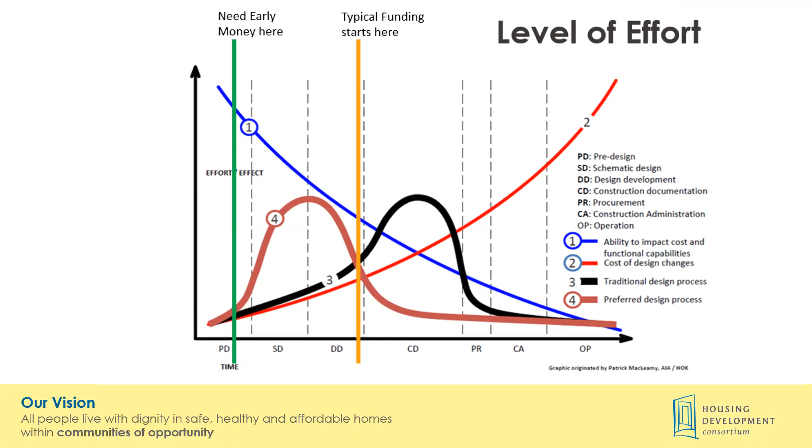So when you look at lines 3 and 4, we're talking about the time and effort for the team, currently focused toward the middle of construction documents, that really needs to be pulled back toward the beginning, where time and effort put in up front makes the decisions that impact everything else following. We all know this. It's challenging to get the resources and time to do it up front, but that's really what we're trying to emphasize in this exercise today.

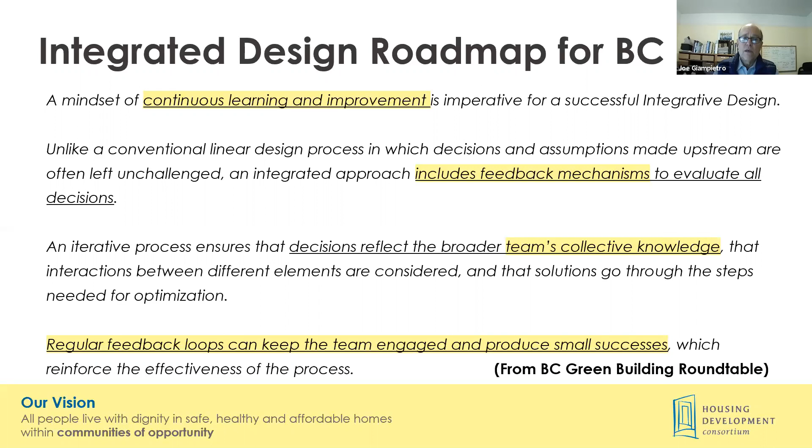Now in British Columbia, they've created a roadmap, and they talk about how continuous learning and improvement is imperative for integrated design. That's not a linear process. It includes feedback mechanisms during the process, and this iterative process enables decisions that reflect the team's collective knowledge with regular feedback loops that can keep the team both engaged and produce successes step by step. That's one snapshot way of looking at it.

So just to remind everybody what we've been doing to date in the Exemplary Buildings program is to look at the context we have. Besides the fact that we have a dramatic need for more affordable housing, we also are in the context of dealing with a changing energy code and its move toward 2030, when we are being asked to reduce energy use in buildings by 70% from 2006.

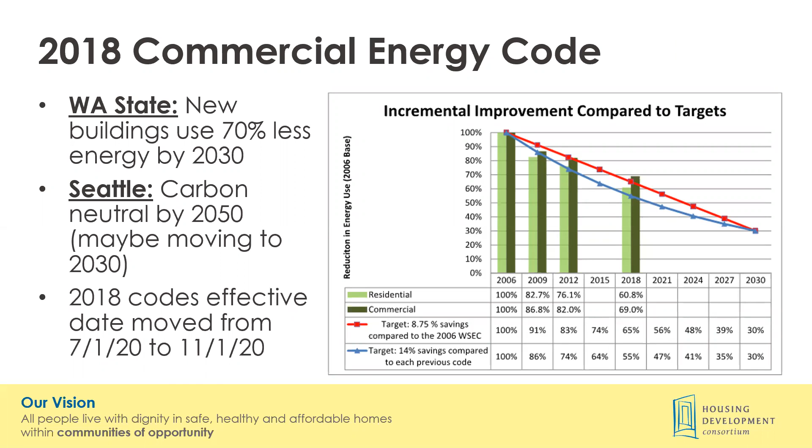So the exemplary measures we've been focusing on include some things I'd like to point out as a reminder. Number one, balanced ventilation with heat recovery, something we started talking about two years ago as one of those measures, and now is very likely to be part of this 2018 code coming up. So it's now code, an example of something taking place in that time frame getting to 2030.

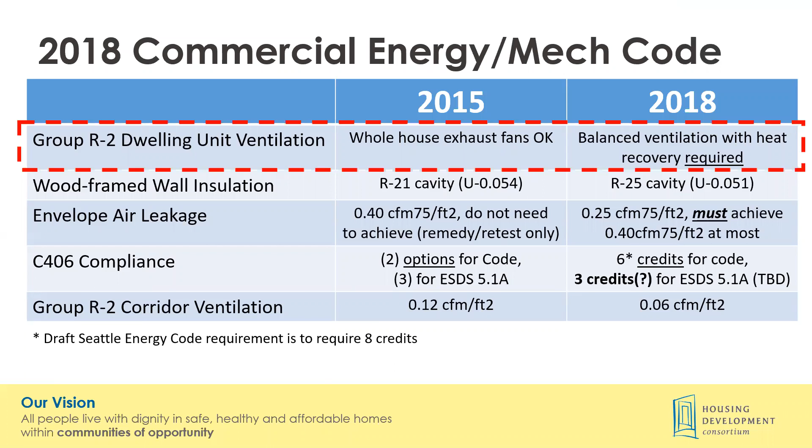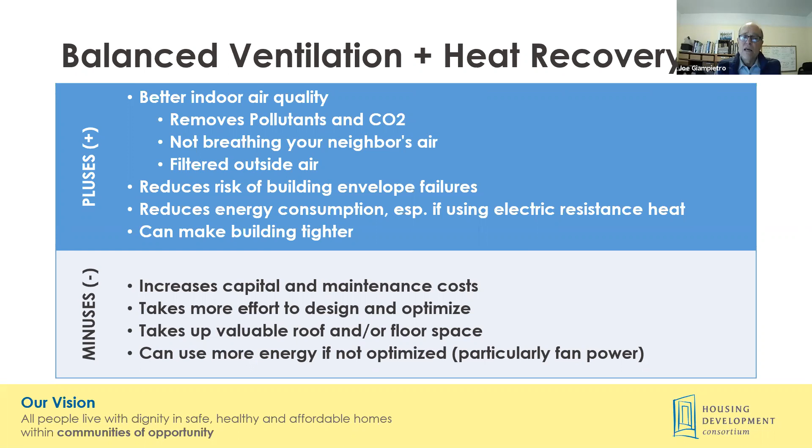And some of the things that come with that, besides energy reduction, energy consumption being reduced, the biggest values are really having good air quality by removing pollutants and CO2 and reducing the risk of building envelope failure. So it's a health and building durability factor, and to a little less extent, the energy consumption.

Yes, we can switch from gas to heat pump hot water, but the biggest savings really are available through how we distribute the water through the building, both in the time to tap within the unit, which saves water and energy, and the pipe sizes and how insulation is handled on those pipes, which can make almost 100% difference in the energy used to supply hot water.

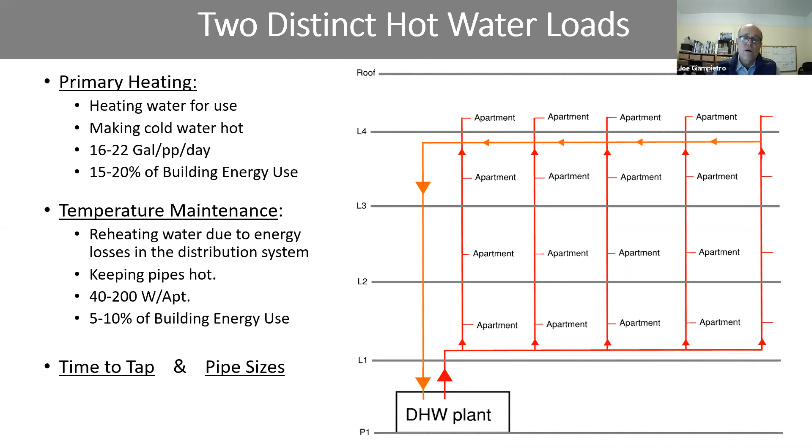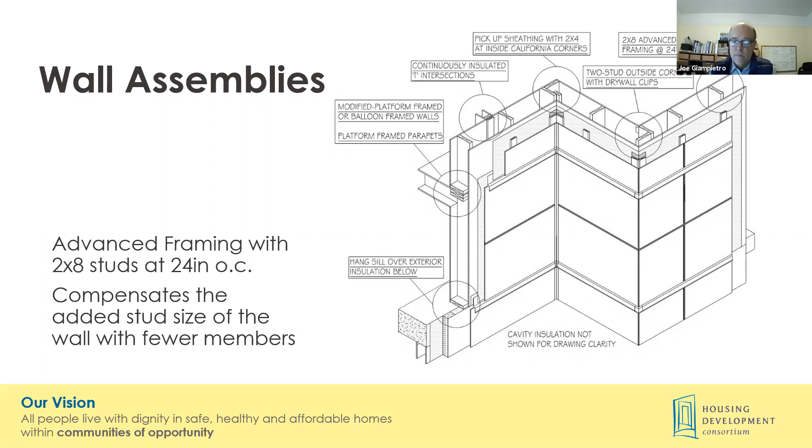We've also had some great work done on integrating solar PV, and that's one of our promising practices that's already had its charrette workshop to date.

So with that, Becky, I'll turn it over to you. Great, thank you Joe. Hi everyone, I'm Becky from Walsh Construction, and I'm here to talk about where we're at in process recommendations.

So this is the less sexy side, I think, of building and designing a building, but really important to our work. As Marty mentioned, we're in the process of developing what we're calling an integrative design process guide. I think a lot of folks out there might like a very detailed checklist of everything to do during the pre-construction phase to really develop a good design.

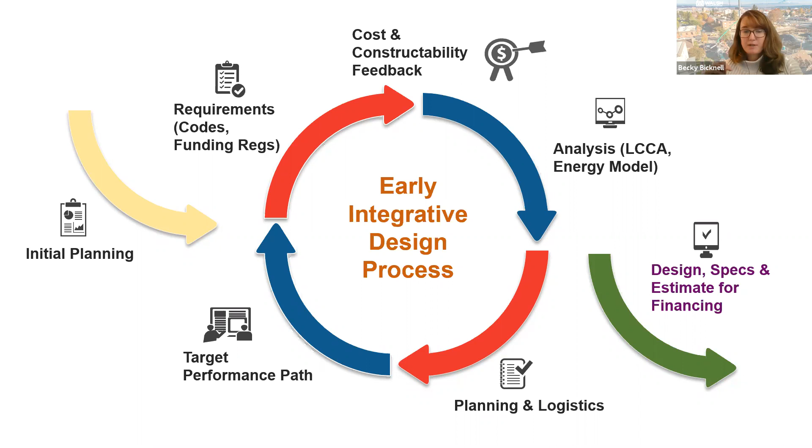In some cases, you might need some analysis to support your efforts. The goal, shown by the green arrow at the right side, is that projects go into their funding efforts having done at least some of this, so that they're coming in with the most cost-effective yet highest performing project into the funding process.

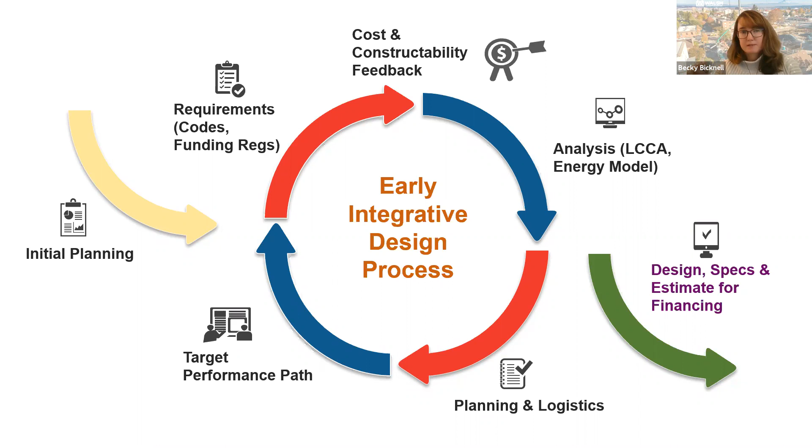As we've reiterated, there's some real keys to this, which is very intentional goal setting and team building - trying to get folks out of their silos a bit, maybe earlier than you might think, as some of these new measures that are driven by code or high performance are somewhat technical. So it really is setting a framework of collaboration and soliciting that expertise.

I would say one of the missing pieces to some planning efforts these days is really effective integrative scheduling. This is everyone bringing their process expectations to the table, as well as some key financing deadlines, to really make sure everyone has awareness of what goes into getting to schematic design, for example.

What goes into a design build process. I think owners can have a very different interpretation of what design build means compared to a general contractor, and so really kind of flushing that out. And then, as we've said, a very early focus on cost efficiency in order to make sure that your project is queuing up for funding success.

So advance. This may be a familiar graphic to a lot of people, hopefully, but some of the line items might be a little different. Every project goes through a scheduling exercise. Sometimes it's created by the architect, sometimes by the contractor, sometimes by the owner. Whoever creates it, I think the recommendation is that you want to think about adding some new elements to it, so consideration of exemplary building might go into some of these early stages.

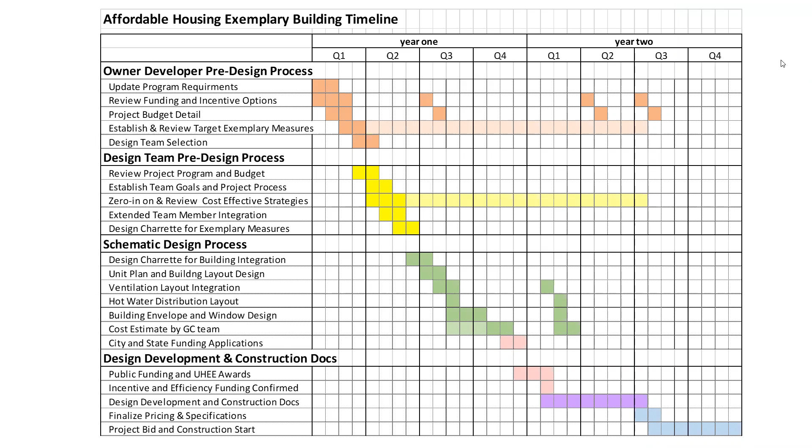Layering in financing deadlines might come into it, and then some of the key review and option vetting processes we might go through, you could also layer in here. But I think one of the takeaways from this graphic is to show that it can really take up to 1 year to 18 months to effectively get through an exemplary building design vetting effort. So backing up from, say, you want to bring a good schematic design and pricing effort into your financing application, really backing up as to when you need to be selecting your design team and starting to bring in some of those sub-consultants that might really help inform your performance path.

You can advance. So looking at the early phases, and this is just a preview of some of the questions and considerations we're going to put in our process guide, there's a lot put on that early ownership effort. And as we'll hear Scott say later, having an early clear definition of performance goals can be incredibly useful.

So starting with high performance, maybe setting a target for what is high performance for your organization. It might be an EUI target, as Joe mentioned, or it might be related to another opportunity or another criteria that you set. But going through that goal setting process can be hugely valuable.

And then obviously some of the other external factors like financing and energy code and building code, as we've talked about. So once again, in the process guide, we'll go through what, besides the questions and considerations, what might you look to see happen at some of these stages.

So coming out of an early stage with that consensus and with a really intentional team selection process. So not only are you intentional about how you select your team, but you're understanding how much it costs. Besides your basic architect costs, what other consultants might you have in play and how much do they cost, and what sort of pre-development budget are you needing to manage and find resources for?

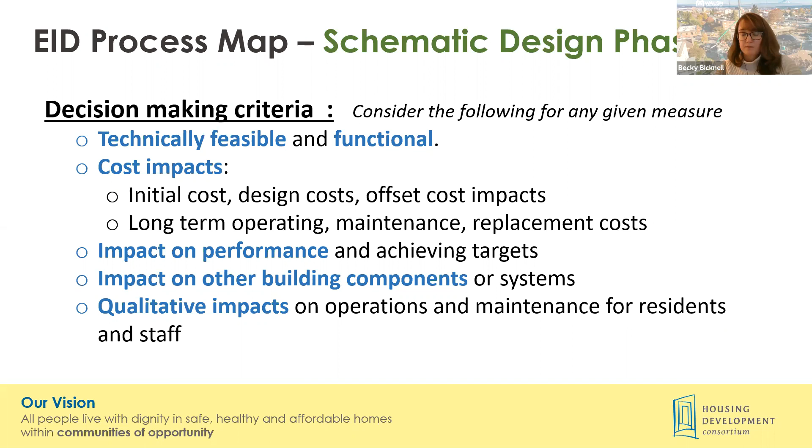So really working on that systems thinking, and Scott will really talk about that here in a minute. And then I think the last thing that is really important for a lot of operators is some of those qualitative impacts on operations, and making sure that ownership and maintenance staff feel comfortable with the systems that are being proposed.

So some of the key strategies and tools that we've seen that can be helpful, that maybe owners typically do a little later but might want to consider doing a little earlier, is using tools like energy models and life cycle cost analysis. It doesn't need to be a full-blown life cycle cost analysis, but perhaps exploring for some of these new systems some of that upfront cost versus long-term benefit.

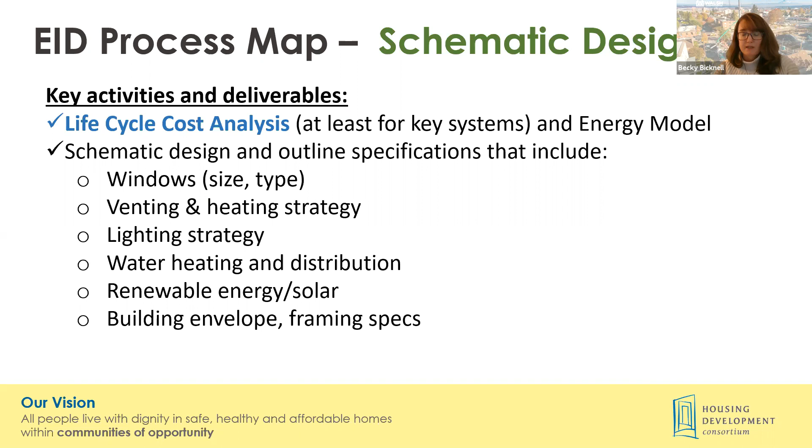And then really honing in on some strategies. A lot of these new technologies, with heat pump hot water heaters or venting systems, really have impact on design. So it can be very critical to hone in on where these things lay out in the building fairly early, so that you're avoiding costly design changes down the road. Locking in those design decisions early is critical.

And then, the process guide - today we'll talk just a tiny bit about past schematic design. So your project's funded and you're moving towards construction. Don't lose your commitment to iterative design and iterative exercises. Really checking in with partners, checking in with your consulting team, and revisiting your schedule and what it will take to get everyone's eyes on that final set of drawings and specs, and feel like everyone's in agreement with what is going into the construction period.

And then obviously don't let up the pedal on performance - move those conversations forward about how performance can be ensured during operations. That's kind of a whole other topic that it sounds like we're going to cover in the coming years, but making sure to put those planning activities in your calendar around operations.

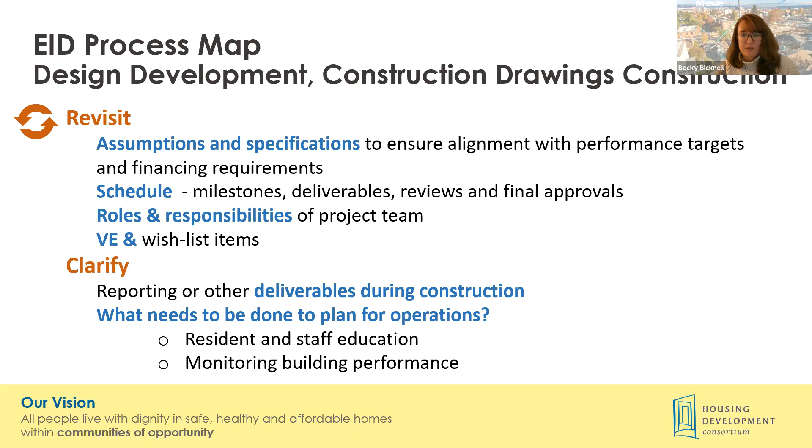And I put this in here because by going through this process, hopefully memorializing some of these key decisions, building them into perhaps some ownership design guidelines - which I know a handful of folks out there have - but I think our argument here is that they can certainly be enhanced, so that hopefully you can take some standardized design approaches into your next process and absolutely breeze through your next project's process.

So I'm going to kick it over to Scott Crosby from Ankrom Moisan Architects. He has been a key player in the early integrative design efforts at the SHA-SAWARA project in the Yesler Terrace area. He's going to tell us a bit about how their team has worked to implement these practices.

Thank you, Becky, and thank you all. My name is Scott Crosby. I'm a project manager with Ankrom Moisan Architects, and you are looking at an image of the Seattle Housing Authority's SAWARA project in Yesler Terrace. It's block 7.3. Next slide, please.

So looking at SAWARA and the early integrated design process, some of the primary ingredients or components that were present here that were extremely valuable: number one was a champion - Tom Eames from Seattle Housing Authority, with a great deal of experience and knowledge of these building types, and fully enrolled in the value of an efficient and durable building. He knows the operations as well, and knows what costs money.

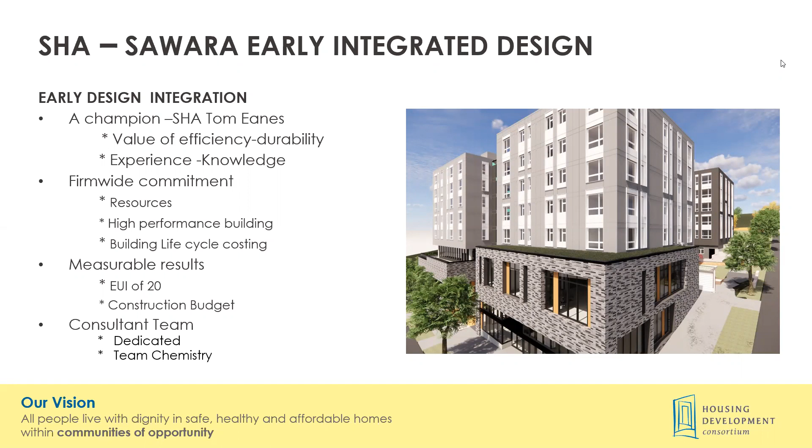The consultant team - there's many different words that could have been placed here, but dedicated, I think, in general we are a very dedicated group to this. It's a very good team. And the last one is interesting: team chemistry is so important, and it's been a very rewarding project. The level of communication in working together, rolling up the sleeves and setting a bar of, no, I can't just do this item myself, I have to cross-reference with the rest of the team. So I feel very special about that. Next slide, please.

A little bit about the team. General contractor is Marpac Construction, mechanical and plumbing is Ecotope, energy code compliance is O'Brien 360, and building envelope is RDH, all of which have been very active in the exemplary building program. Another tribute to the efforts of this group, and to Marty and Tom at Seattle Housing Authority for choosing to have these consultants on the team.

A little bit about the building. We're 114 units, type 5 over type 1, approximately 126,000 square feet. I provide the unit breakdown only to show you the main takeaways: 2 bedrooms are about 20-23%, and 3 bedrooms are about 20%, which is a little higher than some of us may have been used to seeing.

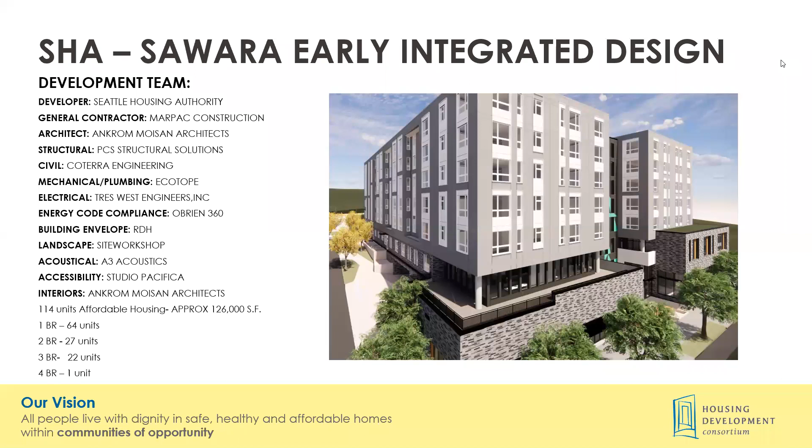On this slide, you get an idea of the basic shape, generated from several factors. Number one, the owner really wanted a secure but light-filled courtyard, with eyes on the kids for playing. The orange represents 3 bedrooms, the green represents 2 bedrooms, and white are 1 bedrooms. The 2 and 3 bedrooms are placed on the corners to take advantage of light on 2 sides and the related efficiencies. The left side is an enlargement of the 1 bedrooms, which will come into play further down.

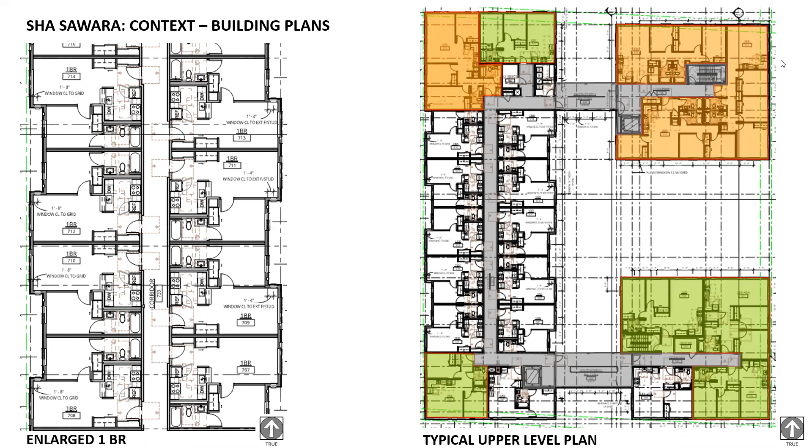The wall assemblies were an item the task force spent a lot of time on. I was very concerned about this from the beginning, and thrilled with the team. We had preliminary discussions with the consultants to prepare for a design charrette, and the timing was very important. We had some of our basics down, but we knew it was time.

The charrette attendees included Marpac the general contractor, Ecotope for mechanical and plumbing, RDH envelope, O'Brien 360, and of course structural and AMA. The design charrette was, in COVID time, a Zoom meeting almost 2 hours long, with several elements of discussion.

I'd been a big believer in exterior insulation. So many times, all of us have walked through our buildings under construction and looked at the exterior wall with exposed studs, stud packs and hold downs, and thought, how do we get enough insulation in here? That's why at first I thought exterior insulation would prevail. However, as the team discussed this, several elements helped us lean toward the 2x8 at 24 inches on center.

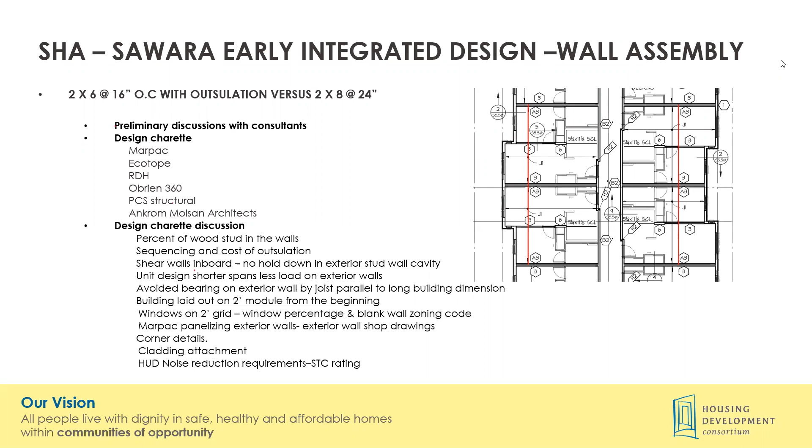Balanced ventilation and heat recovery, shown on the right - the team chose to do individual unit heat recovery in each unit, which Tom really started with. On the right is the model we selected; note the intake locations and some of the access points. On the left is how we started looking at intake and exhaust and integrating them.

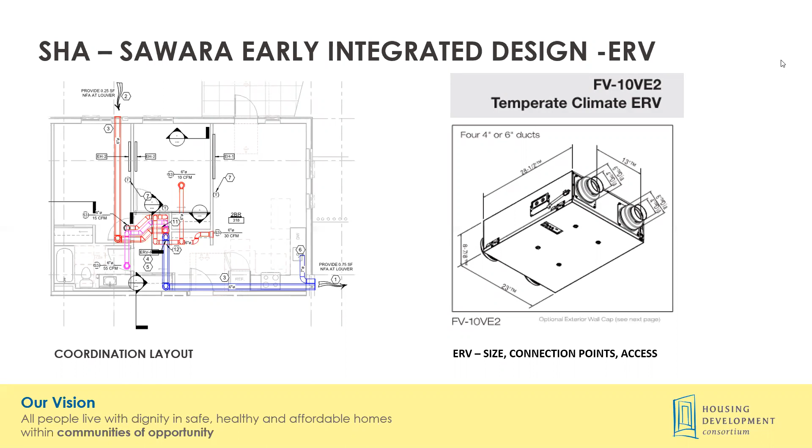So a lot of different elements here. As opposed to the wall assembly, which we agreed to fairly quickly, the balanced ventilation and heat recovery ventilators was a lot more work, a lot more sessions. The requirements of the 10-foot separation between the intake and exhaust, and still keeping the exhaust 3 feet from window openings, really took a lot of time to integrate and fit within.

SHA has some very standard unit plans, and we were able to slightly modify those to find homes for the ERV units. In some cases we put them in closets, in other cases we put them in the ceiling. It does take up space, and there's so many things affected here.

The soffits affect the architecture. We did not want soffits everywhere, so they had to be coordinated. You'll see that what we basically have is the ducts running up and down, or north and south on the sheet, in the joist bay. They pop up and then back down.

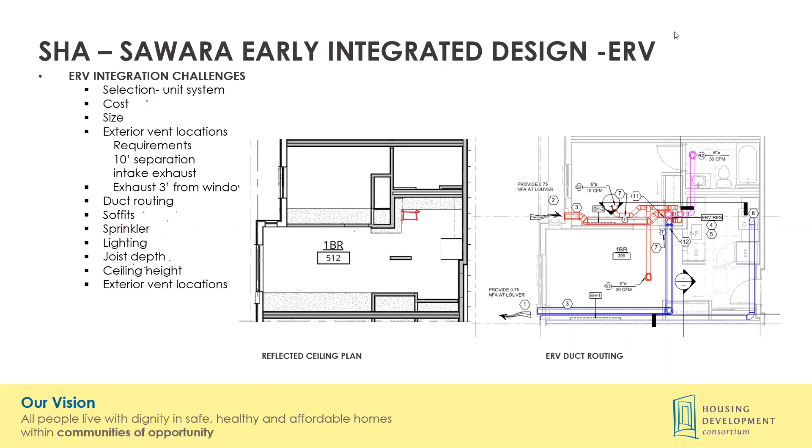Next slide please. So the integrated design for the photovoltaic array, thanks to this group, I'm working with Seattle City Light, there is an incentive for energy production. We started this early. We worked with A&R Solar through Ecotope. We came up with 3 basic systems. On the left is a ballasted system, in the middle is a bracketed system with supports that penetrate the roof, and same as option number 3.

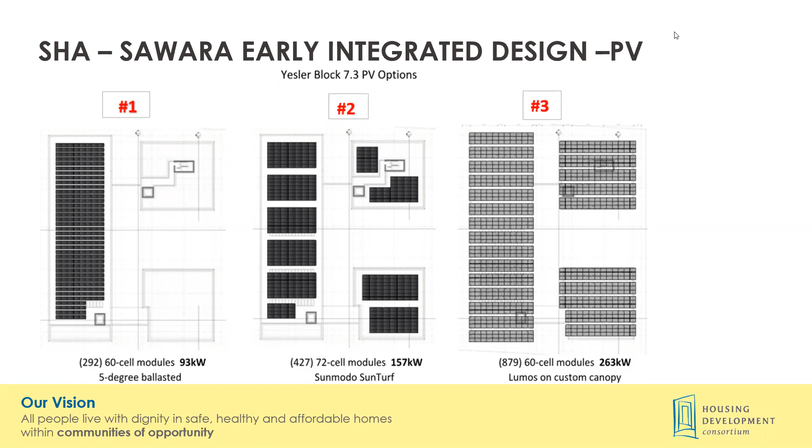Next slide please. So this was done fairly early, but what we were trying to calculate and determine is our payback. It was billed to us as a very high incentive. At one point we thought to cover all of the roofs, but looking at it, and the timing again is very important, it was fairly early, we had just decided on that layout.

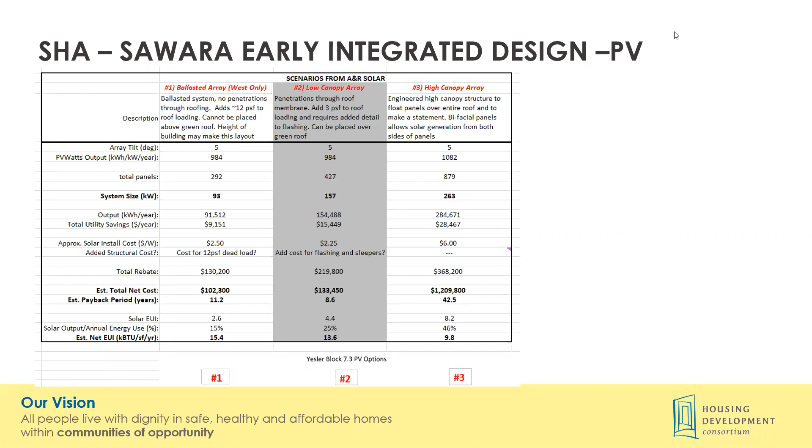Next slide please. So this really brings a lot home for me in integrated design. At the same time we're working with Site Workshop, and we all know we have a green factor to work with, and the space on the ground is so valuable. We've got so much going on there, and we were simultaneously evaluating the cost of, can we put all of our green factor at grade? And it just didn't work for us.

The owner and the team said no, we have to get our green factor up on the roof, which ended up changing our solar array just to this west bar. Next slide please.

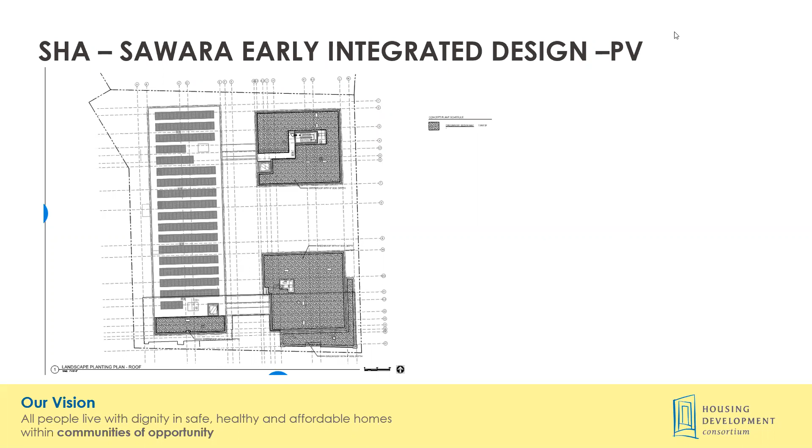So in summary, the available roof area is critical for the PV, mechanical systems integration, the life cycle cost, but it's very interesting how everything relates, the impact on structural systems. So the gravity loads of the different systems, had we thrown more load onto that exterior wall, it could have threatened our 2x6 or 2x8 at 24-inch conversation. Fortunately it did not, but it just goes to the point of beginning to get these systems up front.

Ballasted versus tie-down support systems, the roof membrane and the penetrations are absolutely critical. No one wants to be punching holes through the roof, however we do have the skill set to do that properly. A lot of things to integrate.

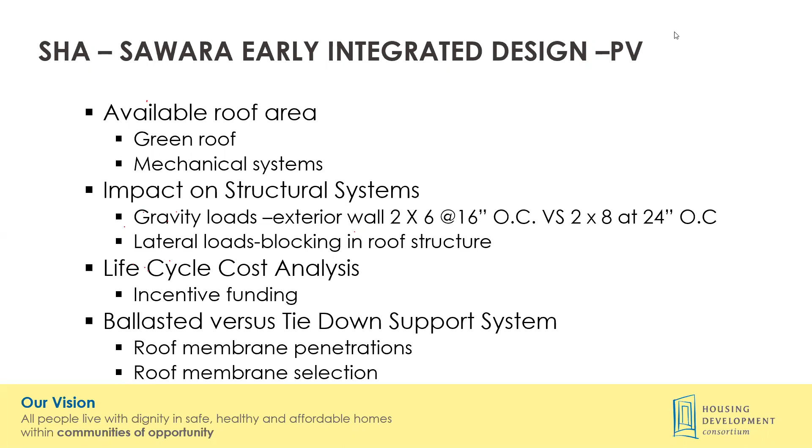What does this mean? Well, in kind of coordinating with Becky and Joseph on this, we were talking about, if there's anything to really impart upon the team, it's the early system identification, as well as the early identification of their system's compatibility. And our computer tools are incredibly powerful.

There's times I wish we'd just get out our Sharpie, and with the skill sets and knowledge of MEP, identify what certain element about an MEP system is going to trigger structural. The ability to see that sooner rather than later is what using your Sharpie is intended to achieve.